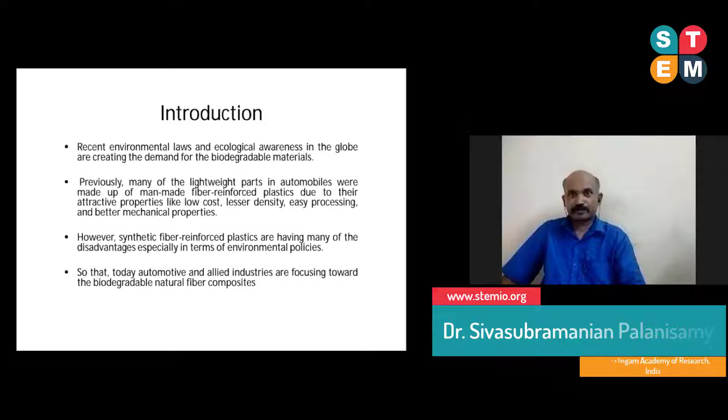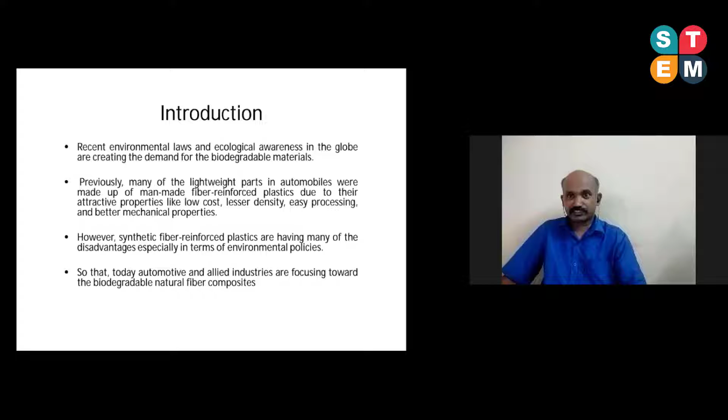disadvantages, especially in terms of the environmental aspect. The synthetic fiber creates so many problems in the environmental aspect. That's why nowadays they are replacing synthetic fiber and moving to biodegradable natural fibers. So the automotive and allied industries are focusing on biodegradable natural fiber composites.

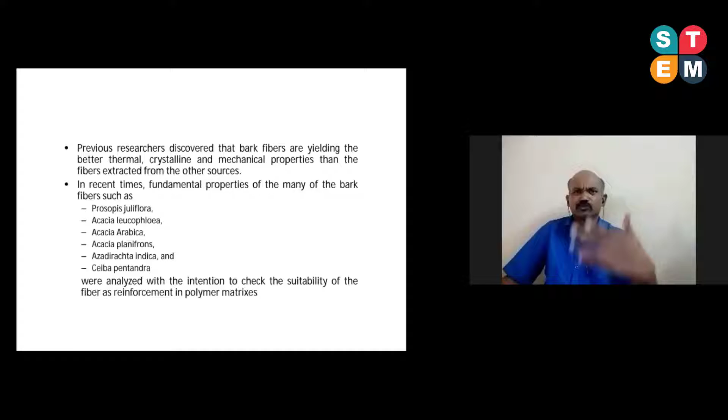Among natural fibers, cylindrical fibers are different and bark fibers are different. The sisal fiber, we can say, is a cylindrical fiber. The bark fiber we can extract from the tree. Previously, many researchers conducted studies using bark fibers, yielding better thermal properties, crystalline properties, and mechanical properties, compared with fibers extracted from other sources. Recently, some researchers are working on bark fibers, and some have already done so.

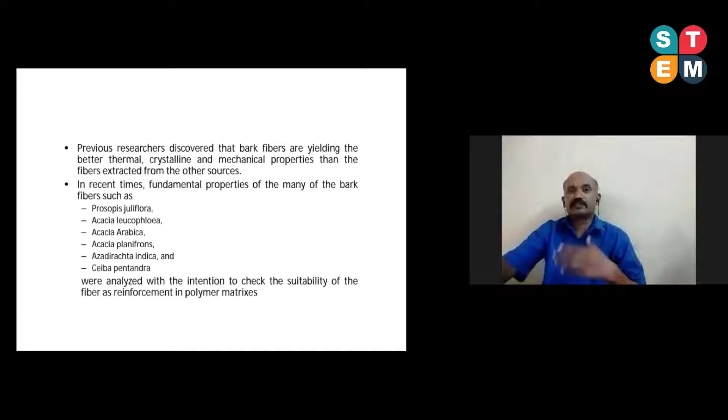Here I have mentioned some of the bark fibers: Prosopis juliflora, Acacia leucophloea, Acacia arabica, Acacia planifrons, Azadirachta indica. These were analyzed to check the suitability of the fiber as reinforcement with the polymer matrix. Because they are replacing synthetic fiber, they are moving to different bark fibers, cylindrical fibers, natural fibers, bast fibers, and so on.

Now I am moving to the objectives. The objective of today's presentation is to extract the fiber from the stem of the Acacia caesia plant, then to characterize and understand the fiber's different properties by suitable standard testing procedures, and to locate the fiber among other possible fibers for prospective use in composites. Then, to elucidate the physiochemical, mechanical, and thermal properties of Acacia caesia bark fibers, contextualizing and comparing them with other previously investigated bark fibers.

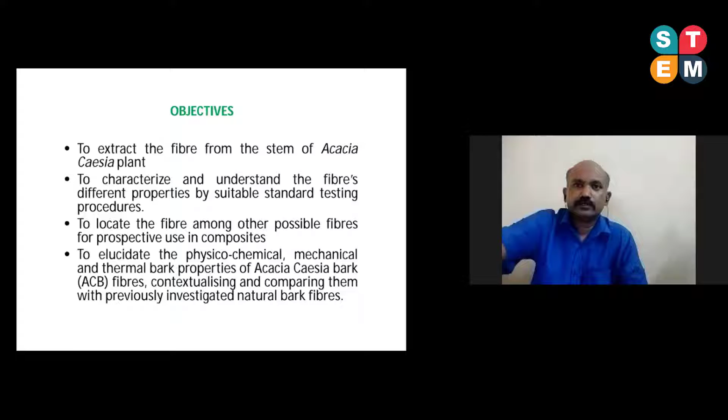After knowing the objective, we have to know what the acacia bark fiber is. Acacia bark is commonly called soap bark. Acacia caesia is the botanical name. Nowadays it is known as Senegalia caesia. Based on some properties, they changed the name to Senegalia caesia two years back. The synonymous word is acacia.

Before that, it was Acacia intsia, and before that, some other name was there. Every three or four years, due to climate changes or something like that, the name keeps changing. Like that, the Acacia caesia is nowadays called Senegalia caesia.

It is highly exploited as a natural resource. It contains different chemicals, such as steroids and antioxidants, and many other chemicals are also included. At the same time, it is used in Ayurvedic, Siddha, and other medicinal purposes. This work considers the potential use of the bark of this plant for extracting natural fibers.

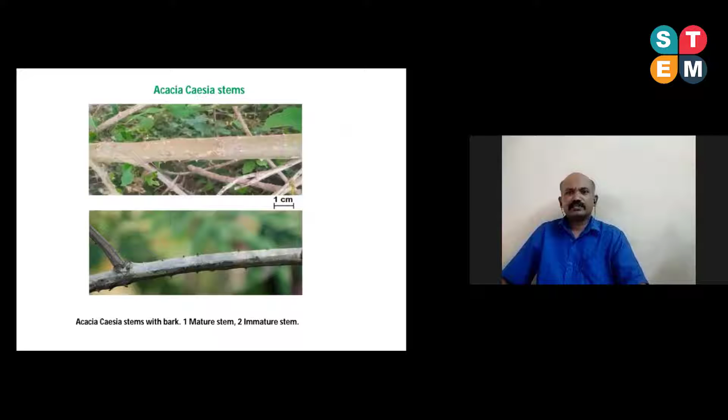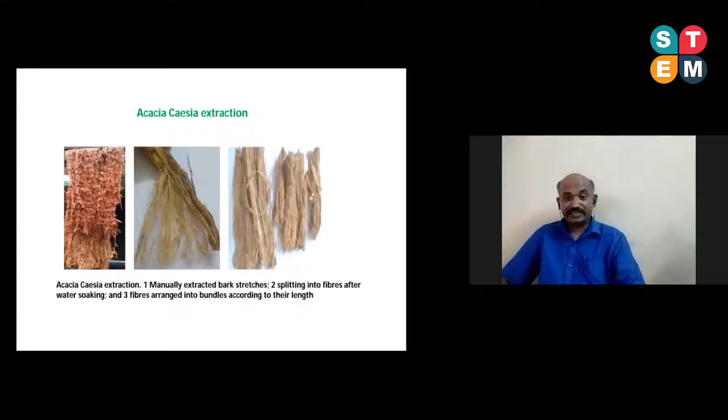This one, you can see exactly: this is the matured stem, and this is the unmatured stem. I just wanted to show you. Actually, the next one is the extraction process. The first step is manually extracting the bark strips from the stem. I already showed you in the previous picture.

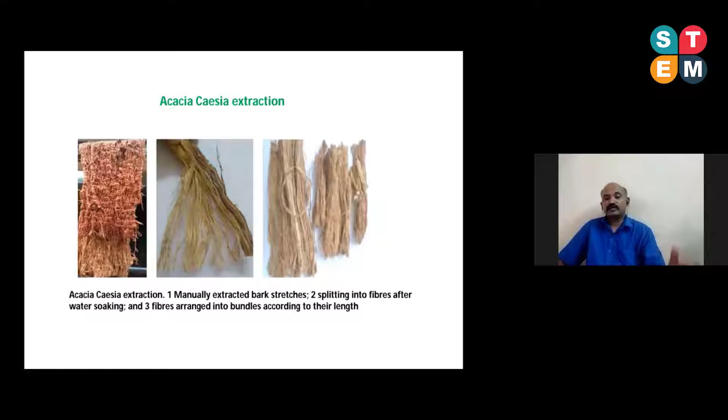After extracting, they soak it in water for some hours. Then after that we get it like this. The third step is that the fiber is arranged into bundles according to the length. Based upon our requirement and our research, according to the length we can cut it.

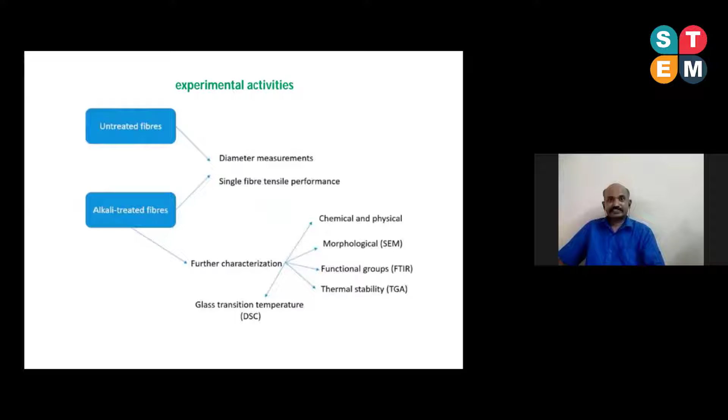Now I am going to move to the experimental activities. Today my presentation concentrates on the alkali treated fiber. The untreated fiber work is already submitted to a journal; the second untreated fiber paper is under process, and the first revision is over. The second one is the alkali treated, which I already published in the MDPI journal Fibers.

Here I am concentrating on the diameter and single fiber tensile test. From the extracted fiber, I took a single fiber, like our hair, something like that. I extracted that single fiber for the purpose of the tensile stress test. Then physical and chemical properties were conducted, then morphological analysis, then FTIR for functional groups. What functional groups are there, everything I have seen. Then thermal stability, at which temperature thermal degradation happens.

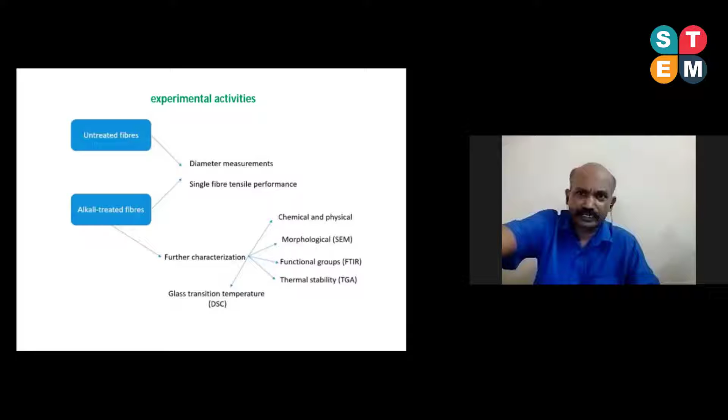These things were done for the untreated fiber also, so when I explain each and everything, I will compare with the untreated. DSC was also conducted. Now we are moving to the density. Here you can see in the first table, the density of the acacia bark fiber: 1200 is the untreated fiber, and 1150 is the treated fiber.

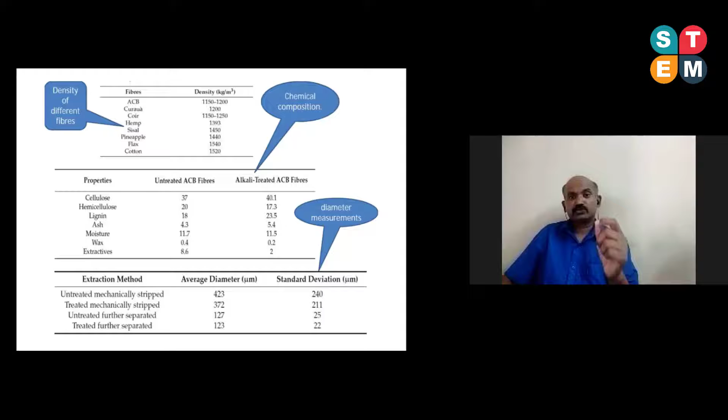In this you can see the suitability of alkali treated acacia bark fiber and its use. Actually, this fiber is used as a filler in polymer composites. The comparison was done with the limited evidence obtained so far for the untreated acacia bark fiber. Actually, this is the first; initially I started the research. The average density of the fiber was 1150 kilograms per meter cube, slightly inferior to the value of 1200. So nearby, the coir fiber has nearly the same value.

In this table I have clearly shown the density value of the acacia bark fiber. I mentioned the high lignin ones because acacia bark fiber has high lignin, as you can see in the chemical compositions. In this chemical composition, you can see the hemicellulose.

You can see that the hemicellulose is slightly reduced. The hemicellulose and the other loose matters are reported as extractives. So when comparing the untreated and treated samples, the extractive value is 8.6. The alkali treated sample used 5% NaOH, sodium hydroxide.

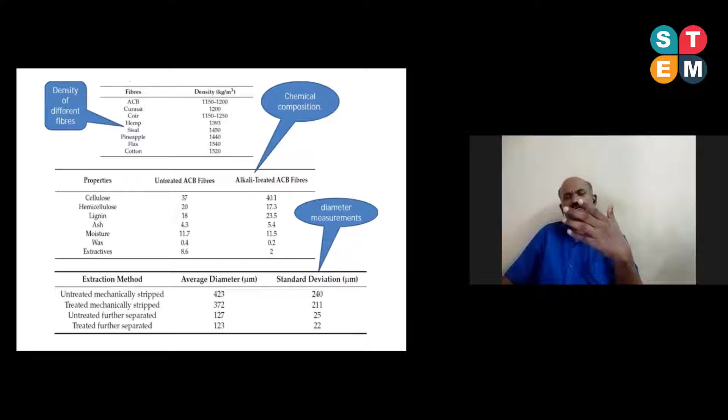In the alkali treated sample, the loose extractives reduced to only two. So what I'm trying to say is, for introduction of the composite, alkali treatment with a higher concentration solution, more than 5%, might be suitable. Definitely it will be suitable. So now 10%, 15%, and 20% concentrations are under process.

Next we are coming to the diameter. We are extracting fiber from the stem, as I already told you. From the extraction process, the fibers via mechanical stripping result in partially separated bundles rather than single fibers. Initially, when I extracted, the average diameter was 423.

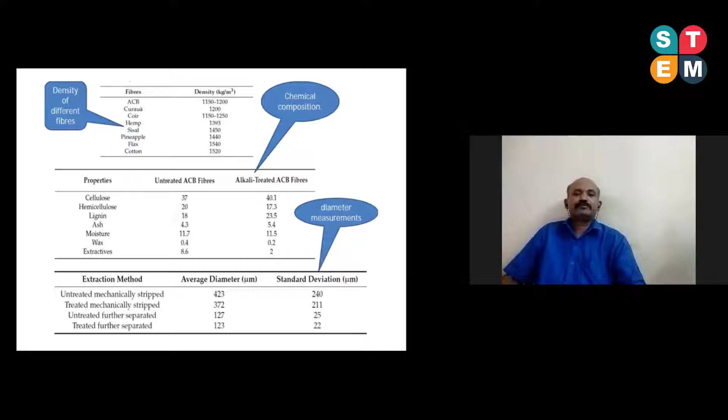That was for the untreated mechanical strip. When I treated with 5% NaOH, I got 372. At that time, I observed that the partial linking of fiber into bundles was due to the presence of loose matters. As I told you, loose matters were 8.6 here and 2 here. This occurred based on the loose matters.

So what I did is separate the fibers further by hand, rather than going for mechanical stripping. By hand separation, the average diameter in the untreated fiber is 127 micrometers, and the treated fiber is 123.

Using the optical microscope, I determined these values. This result, the diameter measurements, is summarized with better clarity in the table we have shown.

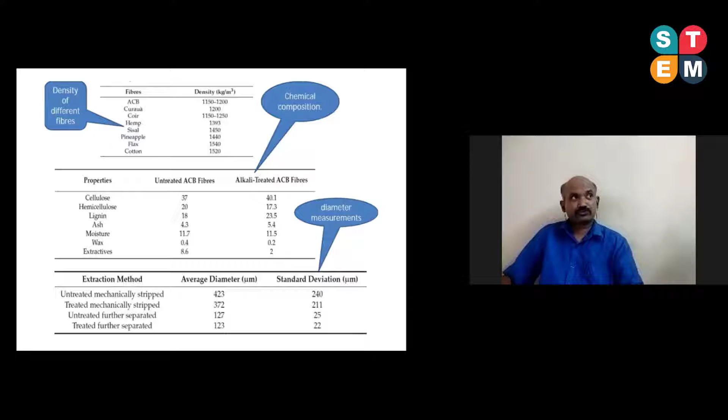Next, we have to go for the mechanical testing. For this, after extracting the fiber, I took 125 mm length of fiber, with a gauge length of 50 mm, and a crosshead speed of 5 mm per minute. Before and after treatment, both times I took 35 fibers and analyzed the mechanical property.

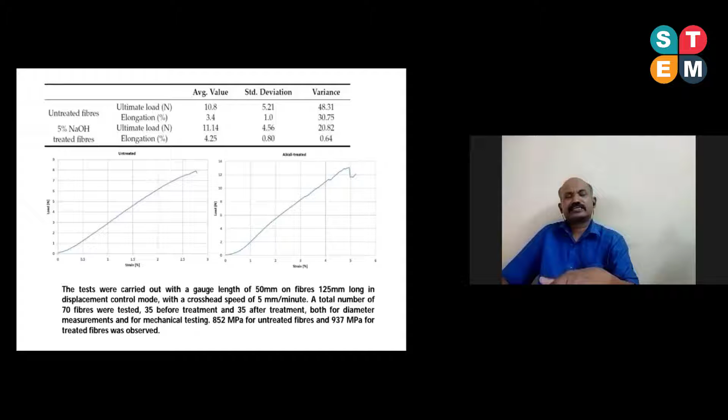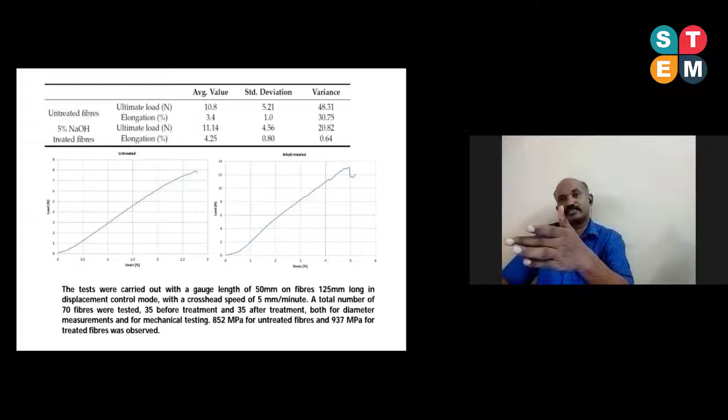When comparing to textile fiber, meaning flax fiber, the textile fiber has 1200 megapascal strength. Compared to flax fiber, our fiber gets a lower value. But comparing my treated and untreated fiber, the treated fiber has better mechanical strength. The untreated fiber gives nearly 852 megapascal, while the 5% NaOH treated fiber gives 937 megapascal. So compared to untreated, the treated fiber gives a better result. But compared to other natural or textile fibers, it is still lower. This treatment resulted in some improvement in the ultimate load as well as the elongation.

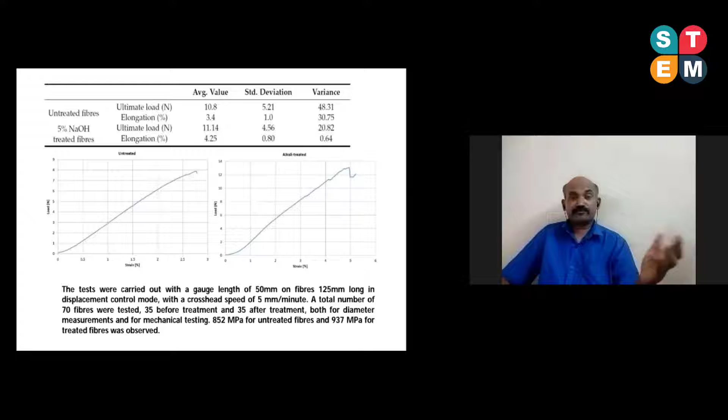You can see in the table the values for untreated fiber and 5% NaOH treated fiber — the ultimate load and elongation are reported. The untreated fiber's ultimate load is 10.8, while the 5% NaOH treated fiber gives more, 11.14. Comparing the elongation, it's 3.4 versus 4.25. Definitely, if we go for another concentration of NaOH, it may increase further.

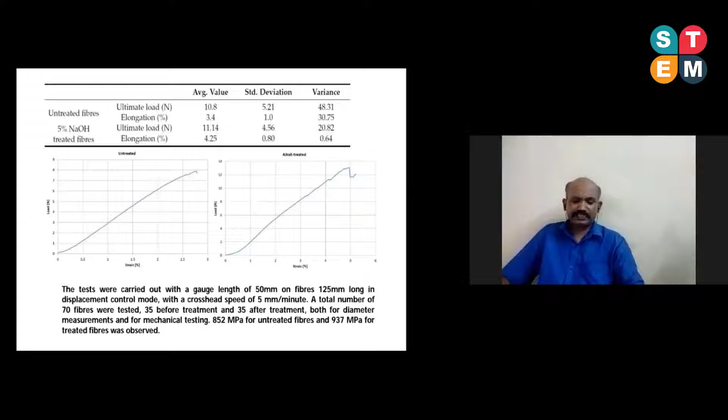Next is scanning electron microscopy. These are all fiber characterization tests I conducted. In this scanning electron microscopy image, the right side is untreated and this is the 5% NaOH treated. What I observed is the bark shows evidence of layers — we can clearly see the layers in each sample.

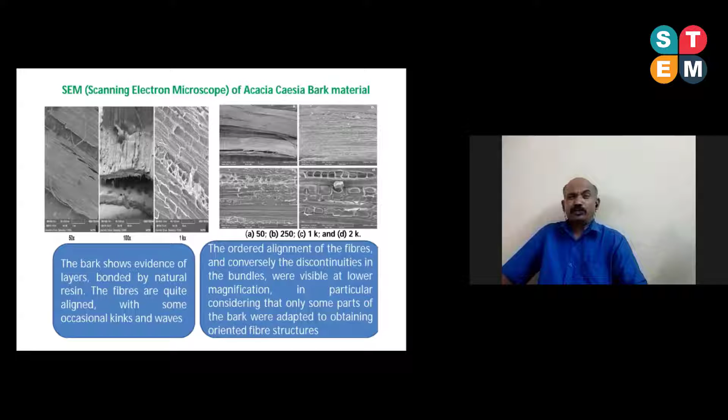Okay, so bonded by natural resins like epoxy resin, polyester resin, or vinyl ester, whatever it may be. These fibers are quite aligned, so you can see it, quite aligned with some occasional kinks or waves.

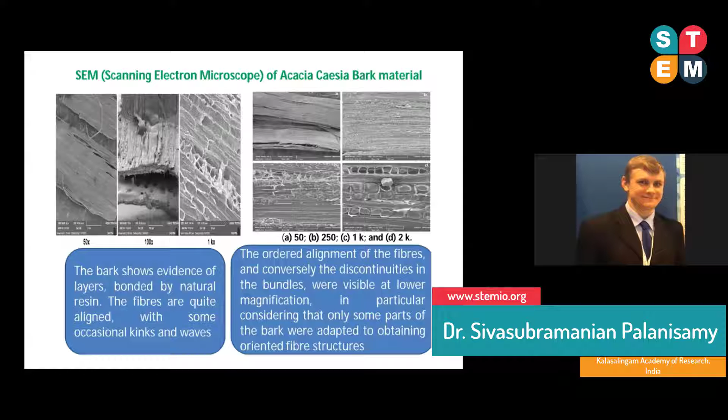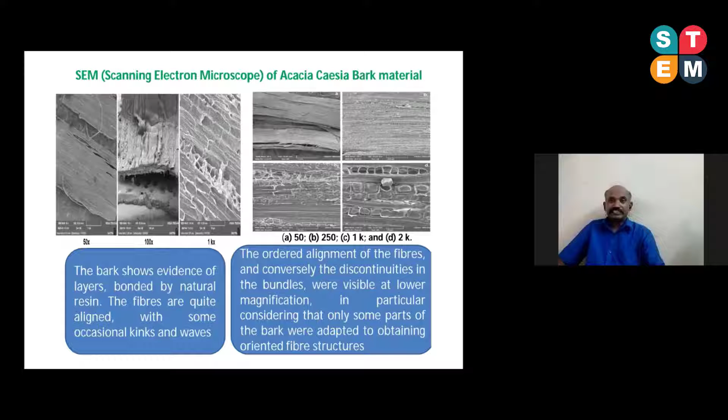At the same time, when you look at the treated fiber, the ordered alignment of the fiber is, conversely, discontinuous. You can see this discontinuity in the bundles. After treating, it is visible at the lower magnification. Considering only some part of the bark, the orientation of the structure was adapted, and you can see the orientation of the structure.

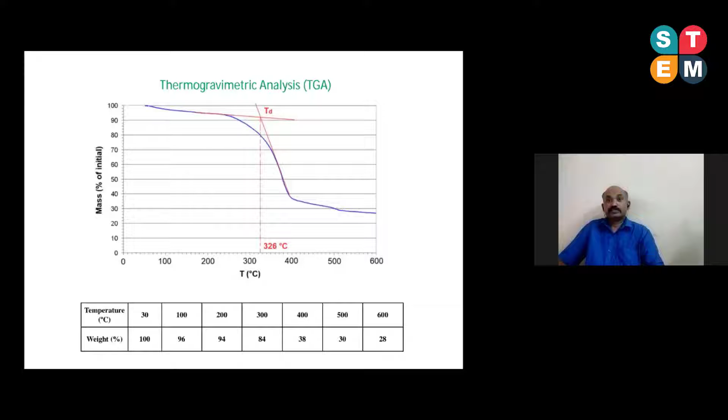So here, in the untreated fiber, as I reported earlier in the Journal of Natural Fibers paper, I got 308 degrees Celsius. When I moved to the 5% treatment, it increased to 326. At the same time, when comparing to the oil palm empty fruit bunch fiber, which also has 308, this acacia fiber has a higher degradation temperature.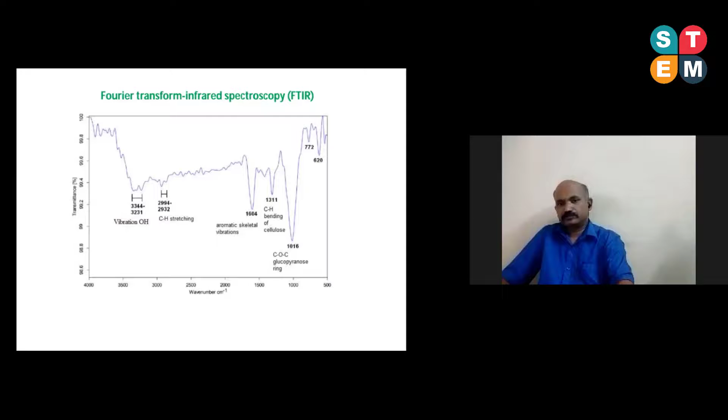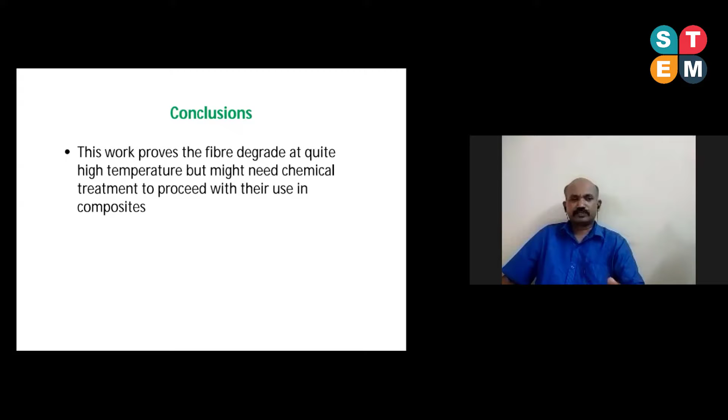Okay, so next is the conclusion. The conclusion is just the one single point I have shown: this work proves that the fiber degrades at quite a high temperature compared to the untreated fiber, but chemical treatment might be needed to proceed with its use in composites. So this is not enough. I just started with the 5% NaOH treatment, and now the research has already started for 10%, 15%, 20%. So let us see.